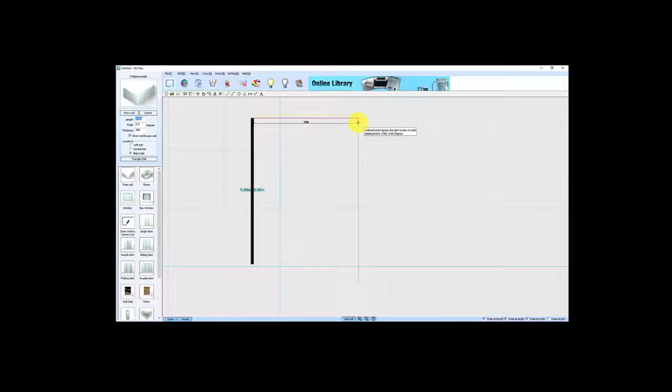So I'll measure out 5,000. Enter. Going to go across 2,500. Enter. Going to go up 600. Enter. Go down 5,000. Enter. Come back down 600. Enter. And then go across 3,000. Enter. Basically just got to create a room.

When you bring the wall back down this way, you see the crosshair will automatically line up with the crosshair on the other side. That allows you to bring the wall to the exact same size. Then I'll bring it across and finish it off, and put my kitchen to the middle.

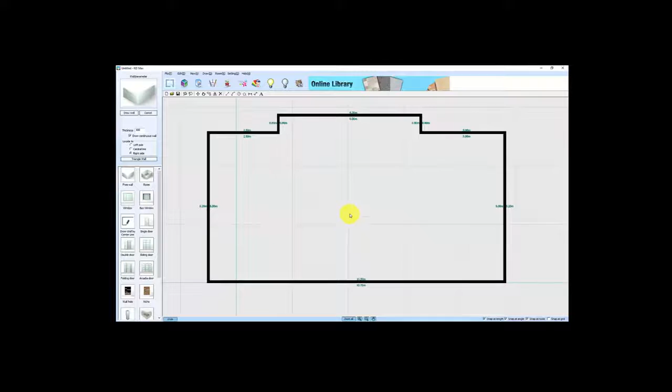From here I'll add in some window openings. I'll go over to my window option, change the size of my window option to 1800, 2 meters for the height, and I want it 200 off the floor. Press OK, click on the wall where I want it to be.

Copy that again and click it on that side as well. Go right click to exit out.

Click on the window if I want to move it and put it in the exact position. You'll see there's a red line and a yellow line with an arrow pointing to the direction, with a measurement. On this one I want the red line to finish at 250. We go OK. On this one here I want the same position, I want the yellow line this time to finish at 250.

And we go OK. From there you can add in other options like adding doorways. So there's a single door. I'll place a single door over here.

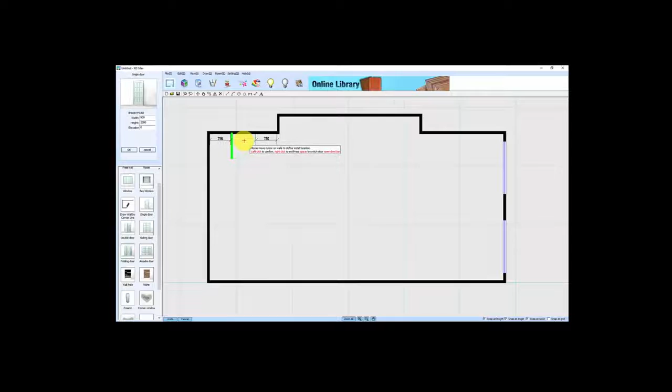Just like that. Now if you want the door to change from one side to the other, you can press your space bar. You can see it's going from left to right, and you can also move it so it goes to an outward opening door. I'm just going to leave it there like that for this one and place it just there.

I'll also place in a sliding door, so we'll go sliding door, and I'm just going to place a sliding door option down to this left hand corner here. Okay, so the main part of my room is finished.

What I'm going to do now is add in a ceiling. So we go up to room, in our menus at the top, we go to auto ceiling, select the middle of the room, and type in the height that I want it to be. And go OK. That puts a red line in the inside measurements of our wall that indicates that we've added a ceiling.

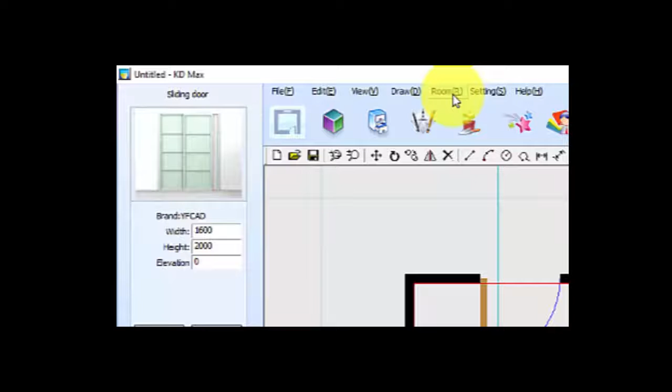What we'll do now is we'll add some lighting at this point. This basically helps you with your rendering process when you go in to do your rendering of the kitchen that you're going to draw.

So what we'll do is we'll add some linear lights. Linear lights is a row of lights. Basically you draw a line from one side of the room to the other, and this option gives you as many lights in that line as you like.

So now I've got as much downlight as I need, I believe, and from there what we'll do is we'll go into our drawing. So we click on our 3D box.

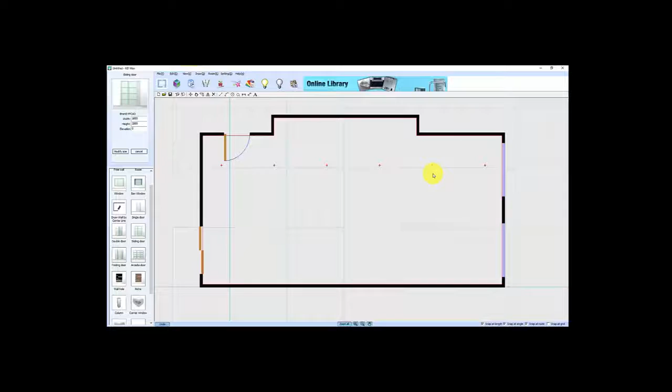We'll go to, comes automatically to this global style setting. Global style settings is where you'll set up your room defaults. Room defaults are basically your door color, your benchtop color, your benchtop thickness, your kicker height, your panel color, basic material colors, and so forth.

I'll just go through the tabs and explain what they do. First one is just a general picture.

Next is setting up your room template - that's setting the color of the walls, door frames, window frames, and the flooring. I'll use this basic one to start off with. Any of those elements can be changed when you're inside your drawing.

Next is selecting a door color. You can select any door color from our range by going into Select. This opens up our menu, inside which are our colors - a selection from Laminex, Polytec, Wilsonart, Formica, the main players in the market at the moment.

I'm going to pick a bright color - China Blue - and we go OK. So now my door color is selected as Laminex China Blue. We go to our next tab, which is where we select our handle.

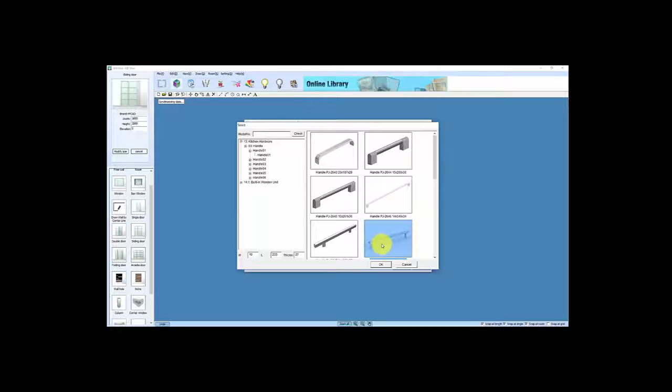Our handles are selected by going into Select. Go find the handle that you want, and pick the handle that you require. As you can see, there's quite an extensive range of handles in the system.

I'll use the one that I want, and I can change the size of the handle to whatever I like as well, so I'll change it to 150. Then we go OK - I just want to match it to that one, and that one, and that one. If you want a vertical handle, you just untick the box here at horizontal.

Okay, go to the next tab. This is where you set the thickness of your bench top as well as the overhangs. I'm going to do a 40mm stone thick top, with a 20mm overhang over the face of my doors, and a 16mm overhang over the ends of my end panels.

We go to our next tab, which gives you the option to set up your kicker heights. Mine is set up at 150mm, 30mm in from the face of my doors, and flush to the ends of my carcasses because I'm going to run my panels to the floor.

We go to the next tab, where you set up the color of the main materials on your job - your worktop colors, end panels, kicker faces, and so forth. I'll go through my worktop ones - I want to change the color, so select material. I want to use Caesarstone Classico, a nice dark color called Jet Black. We go OK, and now I'm going to copy the material to there and to there, and go OK.

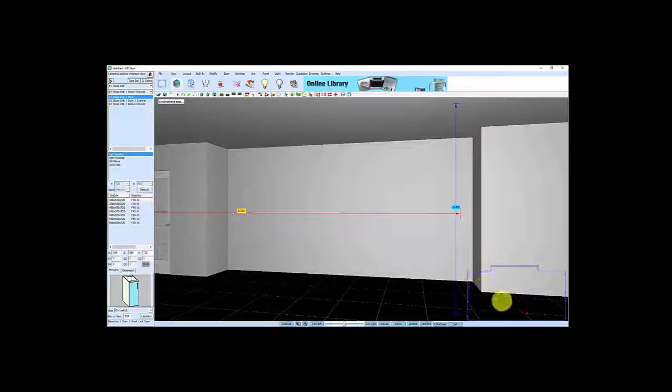You can also navigate in the kitchen area by using this option down in the bottom right hand corner, which as soon as you get into it turns into a camera. That camera will point in any direction you aim it, facing you to where it needs to go. I'm going to point it into that corner, because that's where I'm going to draw my kitchen.

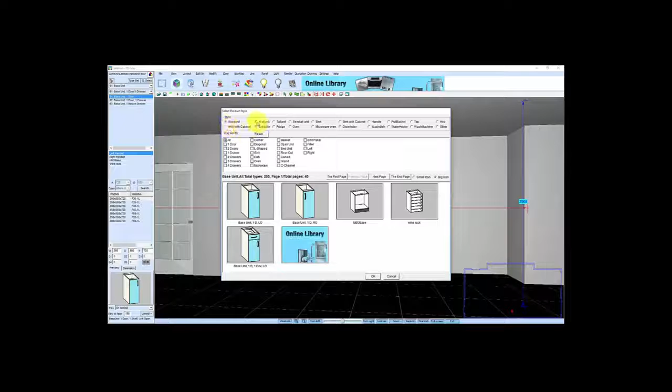Now to draw your kitchen, all your cabinets live in this library on the left hand side. The easiest way to look at that library is to go up to the option called Type Select. You press that and it brings up the Select Product Style box, where all your cabinets live - base units, wall units, tall units, semi-tall units, as well as objects like sinks, handles and taps. So I'm going to start off with the tall unit.

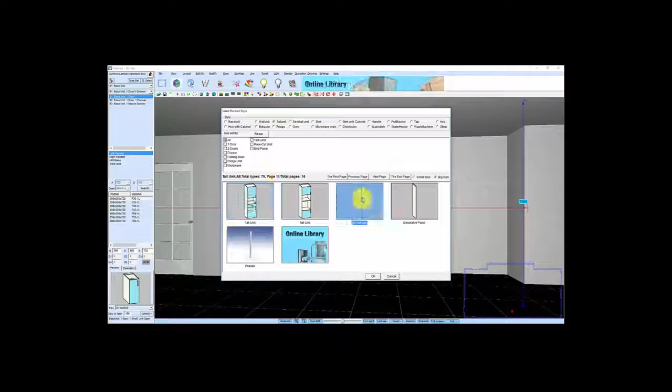In the tall unit I want to start with a filler, so I'll go find my filler, just click through to the next pages till you find your filler. There's my filler panel. I go OK. I want to change my filler from that to 40mm. The depth is 600 and the height is 2250. Okay, automatically sets at 150 off the floor, and we go layout. Place that there, bring it over and place it against that wall and just go no for that option now.

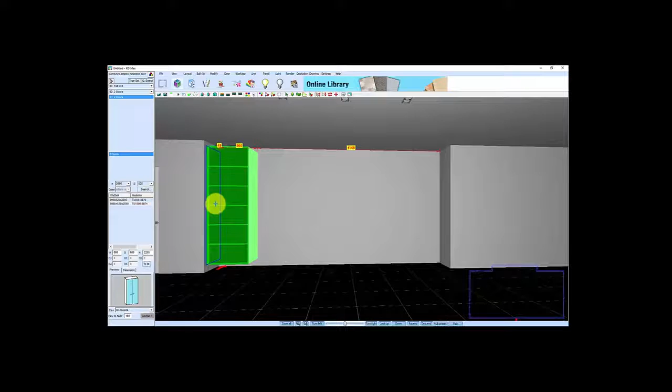Okay, from there what I want to do is then add a pantry, so we go Type Select. We go through to my next page, there's my double door pantry, we go OK. Here what I do is I'll change the size of it to 800, the depth of it to 600 and the height to 2250. Press layout, bring that out onto the drawing, drag it to where it needs to go. When you see there's a blue line touching to the cabinet that you've already put there, it is in position, and you just click on the mouse and that's your next cabinet.

From there you go to your library again and we select a wall oven tower, so I'll select that one, we go OK. From now I just want to change the depth of it, so it's 600, it's 2250 high, and we press layout. Bring the cabinet out onto my drawing and place it to the next one.

Okay, from that section there I want to add an end panel, so we go to end panel, select decorative panel and go OK. Change the width to 16mm, change the depth to 600 and change the height to 2400 because I want this to go to the floor. And we're just going to put that at 0, press layout and place that there.

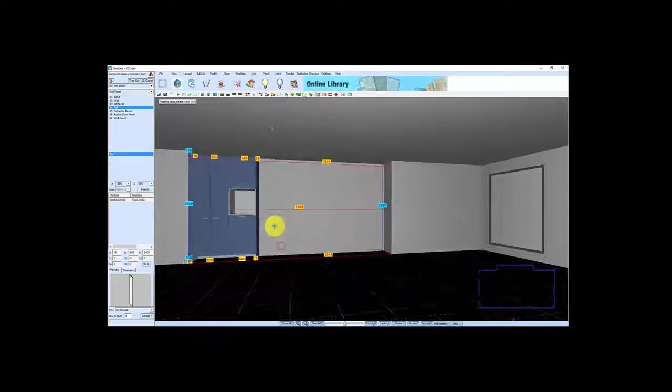Okay, from that side there I want to go to the opposite side now, so I'm going to go up to my wall units. I do want to go to a wall unit double, click OK. The opening size of this is 950, the depth is 350 and the height is 640. It's going to go at an elevation of 1760 off the floor. Be a fridge space, 1760, press layout, bring the cabinet over, butt it to the wall.

What I do then is I'll move that. I want to move it out 250 and I want to move it to the left 40mm. Okay, then we go OK. Whoops, I actually went the wrong way, so we're going to go in 500 this time. That's brought it forward now, so that should be flush to the wall. Gives me a 40mm down the side.

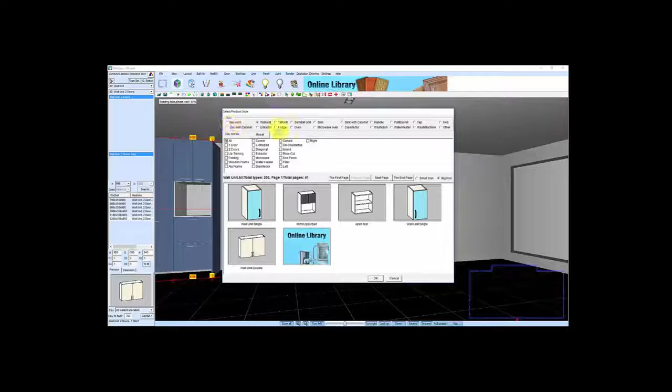What I'll do from there is I'll go Type Select, wall unit, I want an end filler panel, go to filler, go OK, change that to 40, keep it at 350, 640 high, and I want it at 1760 off the floor. Press layout, drag it there and butt it in and just go no. So there's my filler for there.

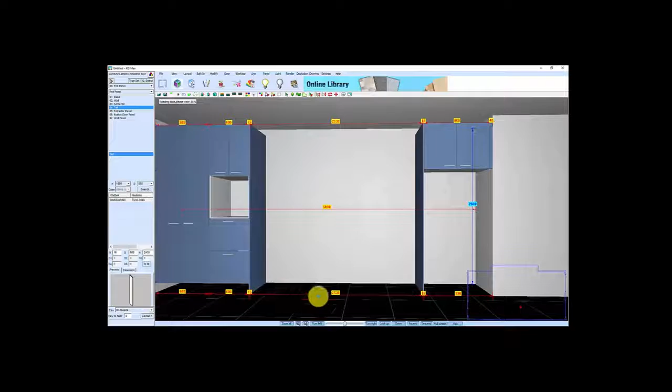So on that side there, what I want to do now is put another end panel and run it to the floor. So we go to tall units, end panel, decorative panel, we go OK. Change the width to 16, change the depth to 600, change the height to 2400, and we just want to go on the floor at 0. Okay, layout, and place that there. So that's flush to there. Then that gives me an opening. So now I've got a 2538 opening in between those two panels.

So in between there, I'm going to put some base cabinets. So we go to type select, go to base unit, go to 3 drawers. Okay, so I'm just going to use this 3 drawer option. So it's a 180 fixed top drawer. Size is 846. Depth is 580. Height is 720. Press layout.

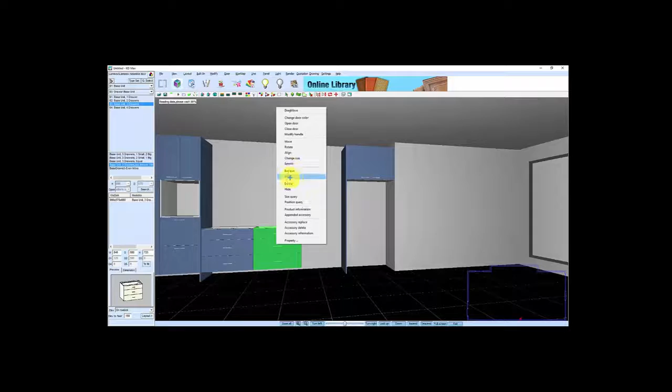Place it there. Then I'm going to copy that cabinet. So right click, copy, and place that there. Then I'm going to copy that cabinet. So right click, copy, and place that there. So 3 cabinets, all the same size.

Okay, so now above those cabinets I'm going to place some overhead cupboards. So we're going to go to wall unit, going to go to the next page. I'm going to use an aluminium frame glass doors. So we select that, we go OK. The width of these are 800, the depth is 350, the height is 840. Elevation is 1560 off the floor. Press layout, bring my first cabinet up, place it to there.

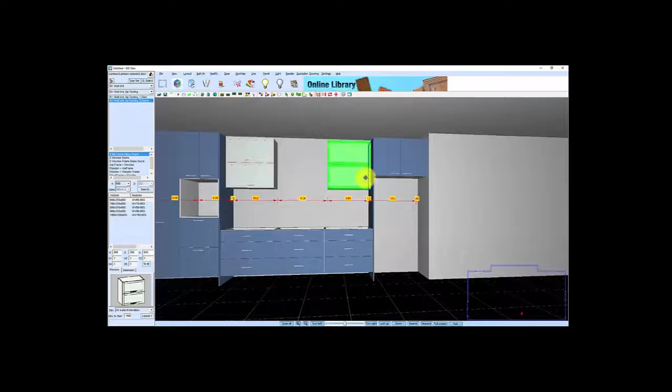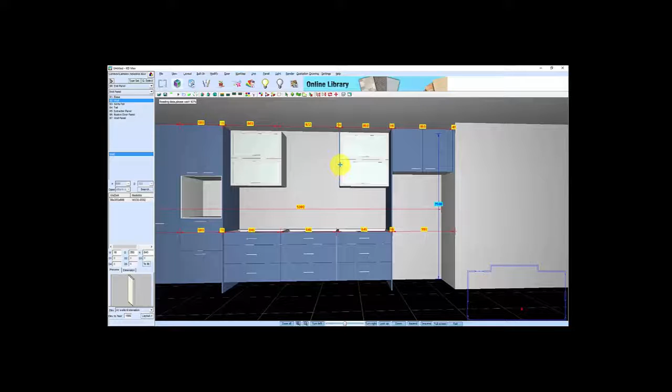Okay, then I'm just going to copy that cabinet, go copy, and place that there. So from there, what I'm going to do is put an end panel on each of those cabinets. So we go to overhead end panels, select decorative panel, and go OK. The width is 16, the depth is 350, 840 high is the height of the panel. 1560 off the floor, put that one there. So then I'm just going to copy that, go copy, and place that on the end there. So now those 2 panels are matching.

Alright, so we've got 906 left in the middle. So in the middle of that, what I'm going to do is put a canopy. So we're going to go type select, going to go extractor, going to go find my canopy that I like. So select through the first few pages, you'll come into where the canopies are, and we'll use this one. Go OK, go layout, place that straight there.

Okay, so then from there what I'm going to do is I'm going to put a bulkhead across the top of all those cabinets. So I'm going to go up to line, going to create ceiling filler, going to select units to create ceiling filler. So I select the first one, I hold the shift button down, select the next one, select the next one, select the panel, select that cabinet, select that end panel, select that filler, select that one, and that one.

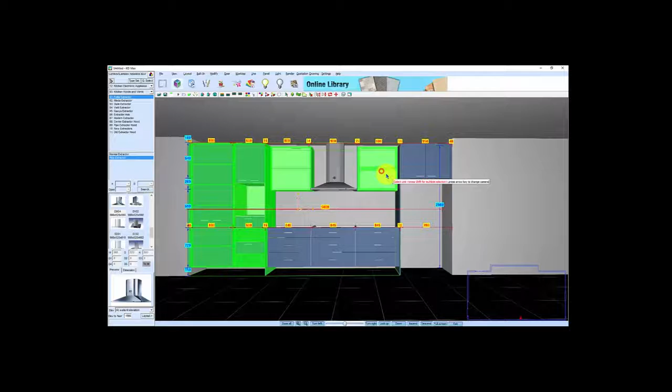Go right click. This is going to go to the ceiling, so that automatically matches to the ceiling height that we set up. I'm going to change this so it comes in 30 millimeters from the front and 16 mil in from the sides. Okay, and then we just go OK. Now you can see across the top there, it's all set up as a bulkhead. So those bulkheads are all sitting in from the face of the doors and in from my end panels.

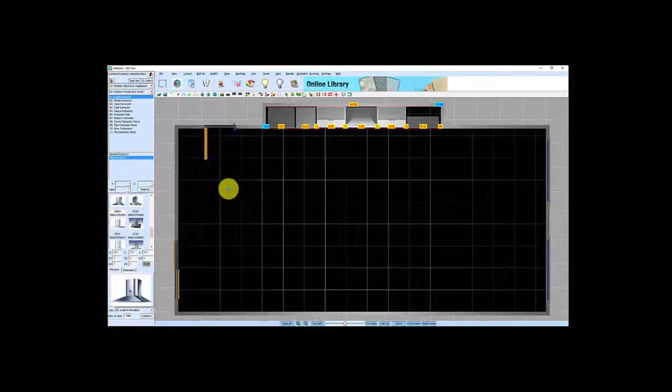Okay, so from that option there, what I'm going to do now is create the island section of my kitchen. So I'm going to change my view on that, so I'll just move it out a bit. I go up to view, I go to top view. This will change where it looks, so now you can see I'm looking down on the top section of my cupboards. So I want to find my first cabinet, so I can go to my library, go to base units. I want to use a three drawer box again, just an equal drawer in this one, and we go OK.

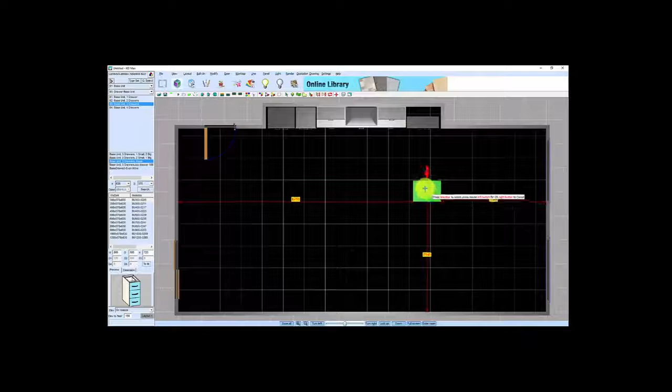Now the width of my cabinet on this one is 800, the depth on this one is 580, and the height is 720. Press layout, we bring it out onto my drawing. What you can see now is that it actually brings a measurement with you, and it's also facing the cabinet the opposite way. So to make the cabinet face the way that I want it to go, I want to press my spacebar. Okay, so now I move my cabinet to where I want it to be as close as possible, and I'll leave it into position.

Now what I can do is I can actually check the position of where that cabinet sits. So I go right click, go position query, and I can say distance to wall, select my wall, and it tells me that I am 1324 between wall and face of those doors. So by the time the bench goes on, I will be 1300. So I might want to move that in, say 200.

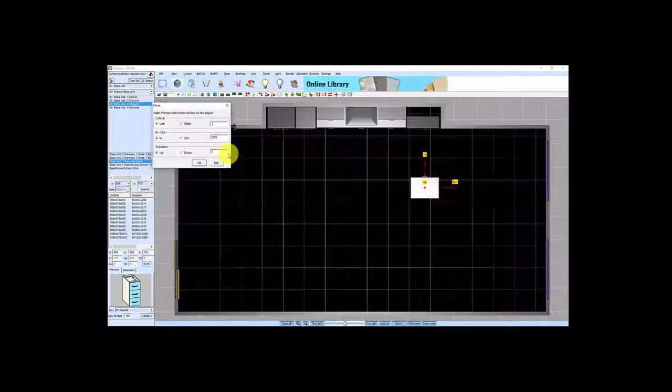Okay, so to do that, I can just click on it, go move, and I want to go on the in direction, and I want to go 200 mil. Alright, so that's going to go okay. So now I should have a clear measurement of 1120 in between. So I can check that again by going position query, distance to wall, 1124. So by the time the bench gets on there, it'll be 1100 gap between cupboards. Okay.

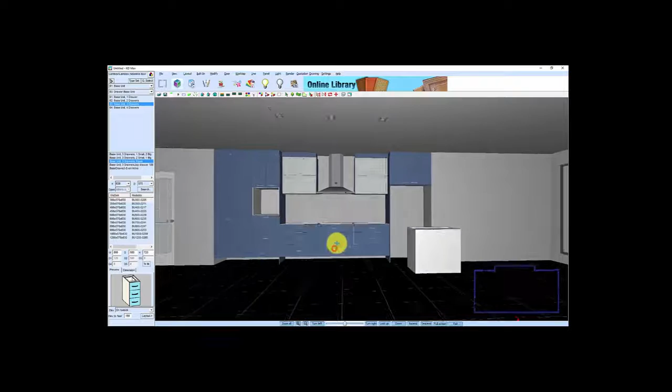What we'll do then is I will then go exit. From there we can now start placing our other cabinets. So what we do is we'll go back to our original view, which is our 3D view. So you press the world over the top there, and what that does, it takes you back to this view here. So from here what I'm going to do is press type select, and I'm going to create a dishwasher space. Decorative panel, go OK, press 16 mil, 580 deep, 720 high. We'll press layout, bring that over and place that onto the cupboard there.

My next one I'm going to do is I'm just going to put a filler above my dishwasher. This helps me with my bench top when I go to fill it later. 20 mil, and it's 850 off the floor. Okay.

Whoops. Press escape. Width is 610. Press layout and go there. So from there I'm going to copy that panel and place it on the end of here. Now you can see I've created a dishwasher space. From there I press type select.

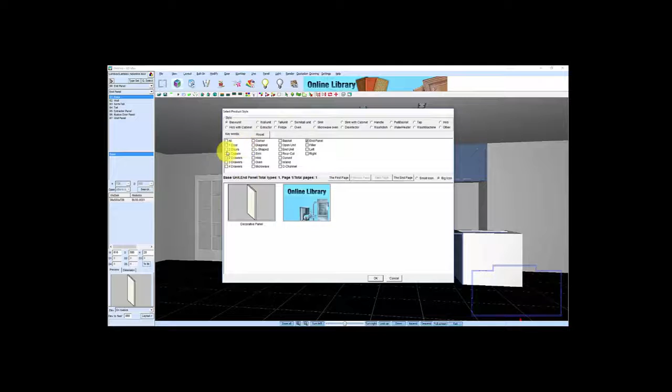What I'm going to do now is put in a sink cupboard, so I just want a 2-door sink cupboard. Press the end panel, press that, go OK. So the width of my cabinet is 800, the depth is 580, the height is 720. We press layout and place that there.

Alright, so from there what I want to do is I just want to copy that cupboard. So we go copy and place it on the end. Oops. We go copy, place that there. Then I just want to copy that one there again, copy and place that there. So there's the basis of our cupboards.

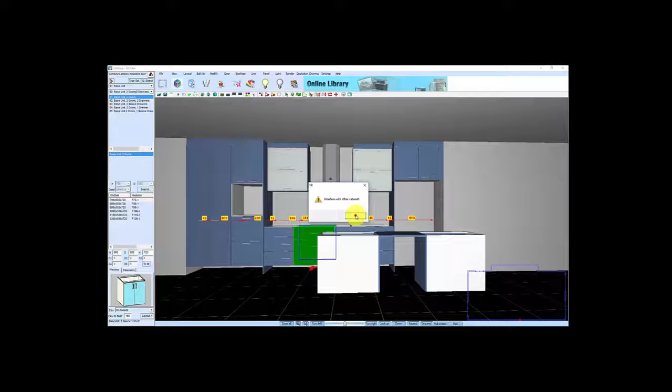So what I want to do now is place a bar back on that cabinet. So we go to base units, end panel, decorative panel, go OK. The width is 1600, is 1921. The depth is 16 and the height is 870. I want to put that on the floor. Let me just press layout.

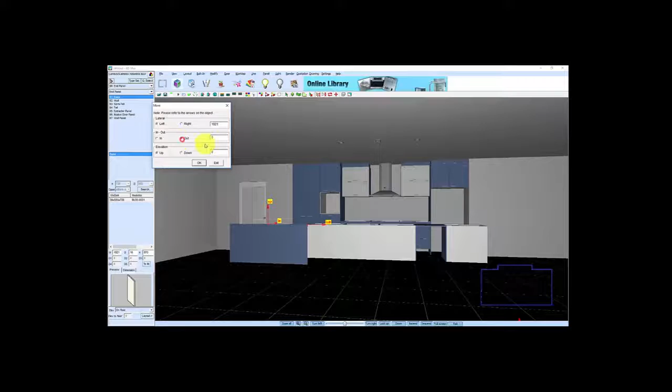Place that there. Get yourself into a position, right click onto that, and we just want to move it into the first position. So I want to go to the left, 1921, and I want to come out 16 mil. And we go OK. So that places the first one into position, and now I'm just going to copy that and place it on the end. I've built it into two because it's such a large bar back, so it needs to be two panels.

Okay, from there what we can do now is we have an added feature which is called automatically install bench tops. This is where the settings that we set up at the start come in handy. Up the top corner here you'll see that's an auto install worktop button. We press that. Once we press that, the bench tops will then go on top of your kitchen, the thickness we set up, the color we set up, with also the overhangs that we set up.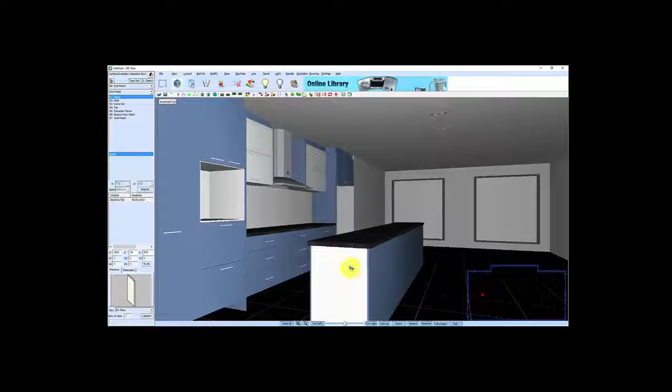From there I want to continue editing the bench top to create a breakfast bar on the right hand side. So I'll go up to worktop, I go edit worktop, I'll select the edge that I want to edit. So it comes up with this. You'll see there's a blueprint of the kitchen underneath. I want to look at that sign there. So that is edge 0 to 3. So we click on that edge, go right click, go side move out.

I want to go 2, 6, and then we go OK. Once you've done that, you go OK. It takes you through to a section where it tells you that's the size of the bench. Then we go OK, and then you can see now, get yourself into a good view of it, we've created an overhang there.

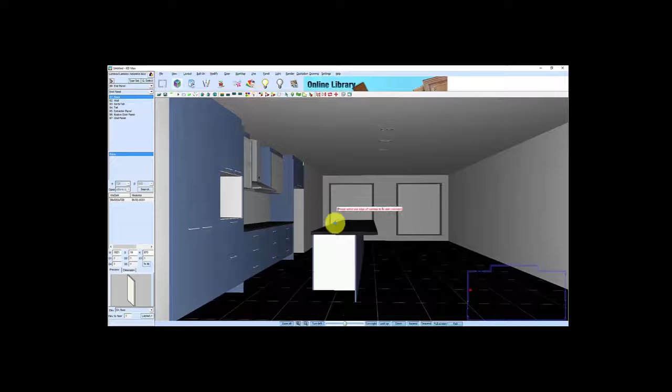From there, what I want to do now is create a waterfall end on both ends of that cupboard. So we're going to go worktop again, create side worktop, select the edge. The width is there, so the width I want to put at 40. Sorry, 24. The thickness is 40, the real thickness is 40, and it's going to go to the floor.

But as you can see, there's our waterfall end. Okay, you can sort of see that looks a bit blotchy. The easiest way to fix that is just go to render, go to fit map, select the edge, go right click, and go OK. So now it's all in one.

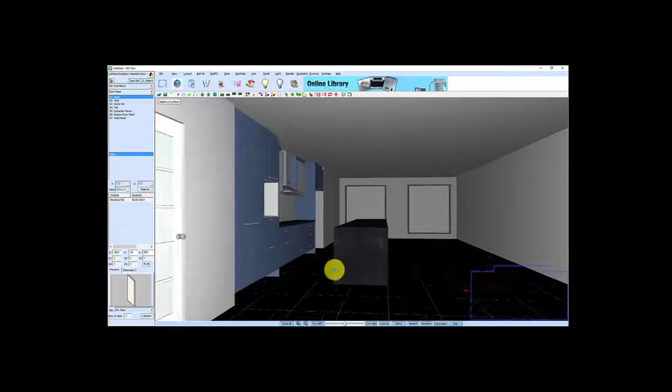What I want to do now is go to the opposite end, and I want to do the same on that section there. So we go to worktop, create side worktop, select my edge, go OK. Okay, then I want to do the same with that. I want to go to render, just go to fit map, select that, go right click. We go OK.

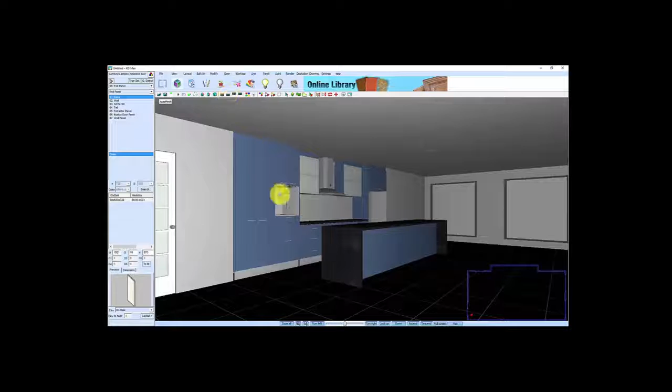Right. So now we are starting to get the basis of a kitchen. You can see from there we've got our island bench. What I'm going to do now is I'm going to put in the kickers. So that is an option with the kickers, the same as what we have with the benches. There's an automatically install next door to it, so we go auto install plinth. Select that, and that'll automatically install the kickers at the color and the dimensions we set up.

If it doesn't do all of it, you just go to line, create plinth, select units, select that one, and go right click, and there it goes, it fills it up. You can see all the way down, point into there. I'll put kickers all the way through there, and you can point through there. I'll put kicker faces all through there.

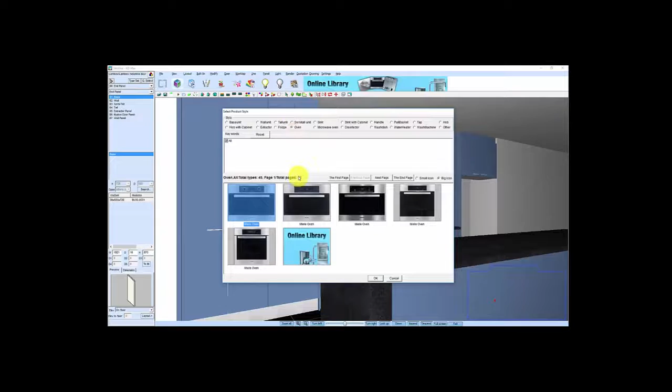Alright, so from that point, what we do now is we'll add some appliances. So I want to add an oven in there first, so we're going to go up to type select, going to go to oven. I'm just going to select an oven, so just this Miele one will be fine. We go OK, and basically I know that opening is already 600, so I'm just going to go auto fit to size. So we go layout, select the bottom of that, and then select that, and that automatically puts the oven in where it needs to be.

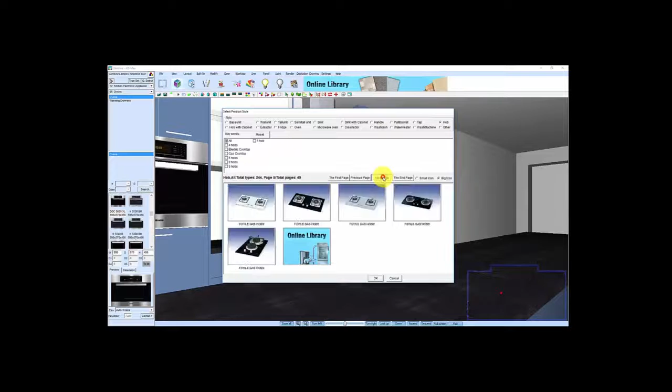From there, what I'm going to do is place in a hot plate. So we go type select, go to hob, just go to all of them. You can see there's quite a few different ones in the system. Quite an extensive range. Something that you want, we can just go to 5 hobs. Gives you large options. We'll just use this Miele one here. We go OK. Size is correct.

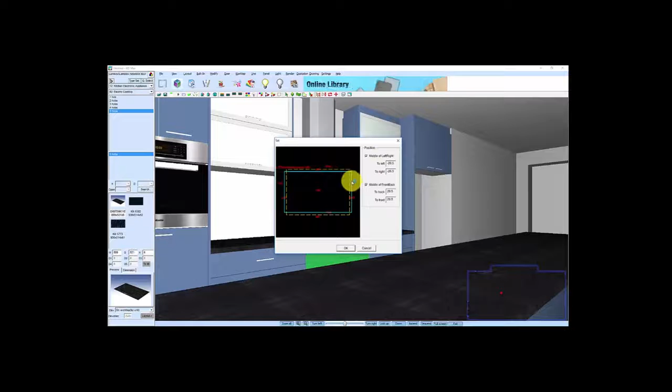I want to basically place it in the bench top by the unit, so by that cabinet there, and we press layout. Okay, press that. That puts it, there it is. The blue line is the hot plate, the yellow line is the cupboard underneath, and then we just go OK. There is our hot plate.

Okay, now you can double check that that's directly in the center of that one by clicking on the hot plate and go align to that. Just go left-right middle, front-back middle, and we just go OK. So now that hot plate is directly above that.

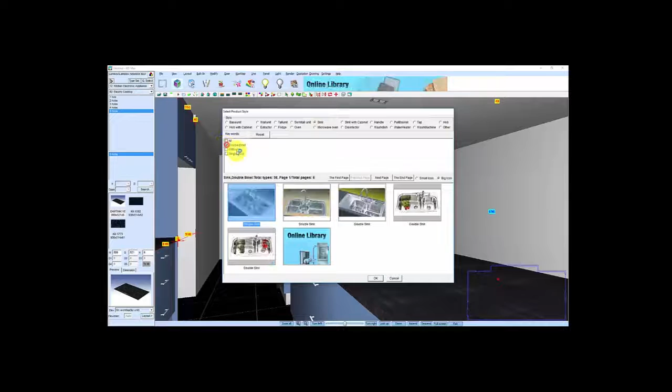Okay, so from there what I'm going to do now is add a sink. So I want to get a good sort of view of my sink cabinet, which is just there. I'm going to go up to type select, going to go to sink. What I'm going to do here is just go double bowl. I'm going to place an undermount sink. I'm going to use this one here. We go OK. The width of my sink, I'm just going to change that to 800.

Press layout, press the cupboard that I want it to go onto. The sink is larger than the unit, the worktop may not be created correctly. Just go yes, because I know it will. And basically again, you see the blue line is the sink and the yellow line is the cabinet. Okay, and we just go okay. Sink over the worktop? I know I don't. I want to go under, so I want to go under worktop. So we go okay. We go okay.

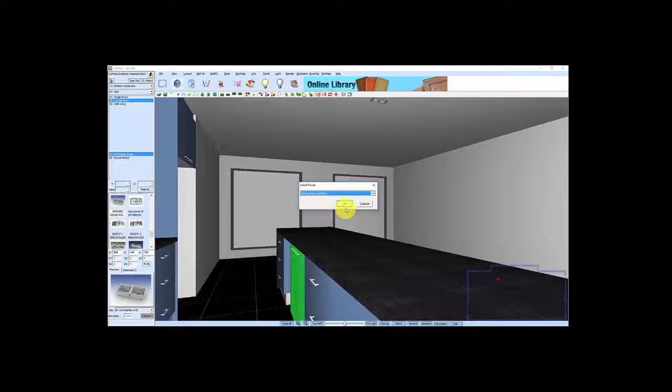So there you see, that puts the sink there. All I want to do now is just move that up. I just want to go up 20 mil, because I want it just to sit down from the top of the stone 20 mil. And we go okay. So there's our first sink. We go exit.

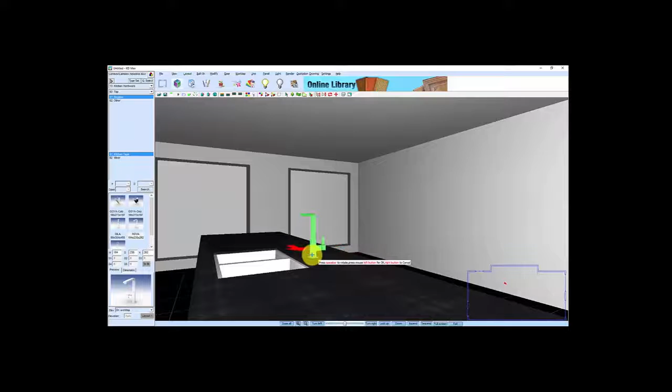Okay, so from that point there, what we're going to do is add our tap. So we go type select, we go to tap, just go through, we'll pick a tap, so we'll just use this one, and we go okay. Alright, the height of the tap, we're going to go on worktop, and we just press layout. What we do then is we just press the space bar, so the tap is turning around, and I'll get that to the middle by placing. Okay, so there's our tap in the stone.

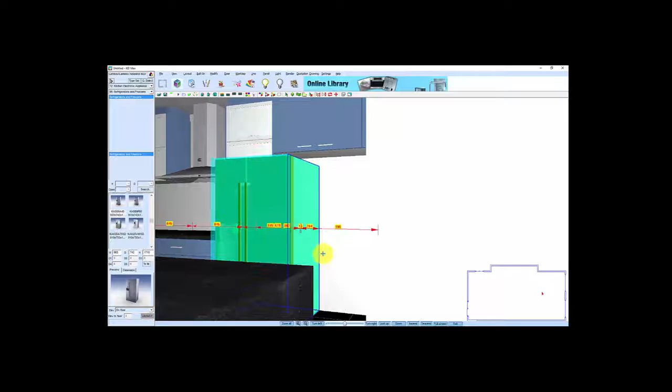Right, so my next appliance is I'm going to add a fridge. So we go over to our fridge cavity. I go up to type select, go over to fridge unit, select the fridge that I want. I want to put in a double door fridge unit, so we select that one there and we go okay. Keep the width at 900. And press layout. Okay, that's going to place that straight there.

As you can see, that's in the middle of that cavity now. Okay. So from there, what I want to do is go back to point this direction here, and I'm going to place in a dishwasher just there. So we go to type select, we'll go to dishwasher, they call it. We'll grab a brushed aluminium one, we go okay, press layout.

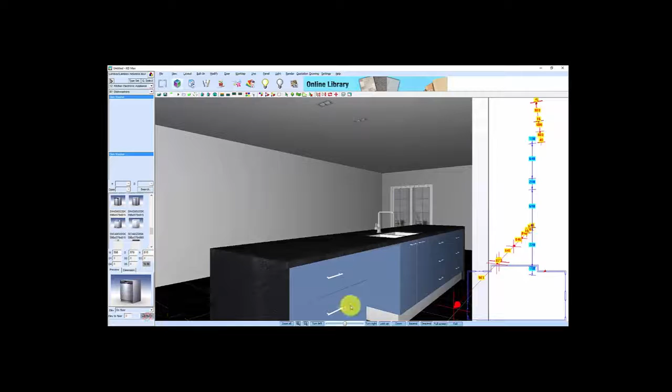Okay, so now this is where I'm going to use my filler, so I'm going to click on that, go align to my filler. So I want the front and front to meet, and I want the left to meet the middle and middle. There we go, okay. So now that places that in there. Now you can also change the size just to make it look a bit better. So I'm just going to go 850. Okay. So there's our dishwasher placed in.

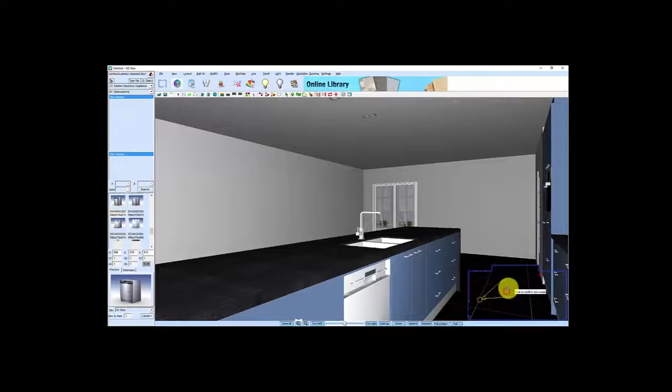From there, what we'll do is we will start adding smaller accessories. So go in and change the floor. So I can click on the floor. I'm going to change the floor to a timber material. So go from carpet to solid timber. I'm going to use Tasmanian oak. We go OK. Alright, I just need to render that.

So we go to render, fix map, select, go right click. I want to change it so the direction of the grain is running along the wall, and just got to change the different laminations. So that's 3, we'll just go 1.5. So now that looks like real timber.

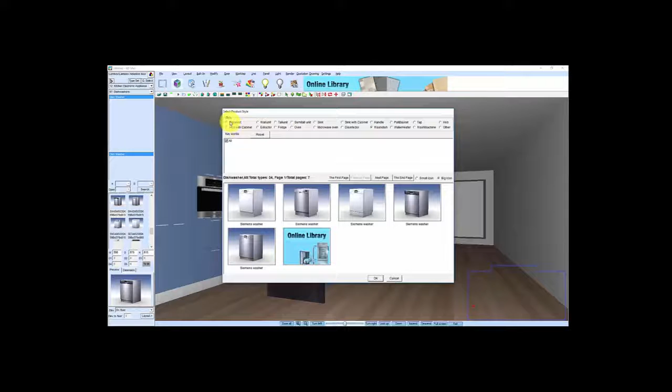From there, what I'll do is I will start adding some other options, like some chairs. So we're going to go to other. In other, we go to dining products, go to the next page, next page, next page. You can see there's quite an extensive range of dining products. Go through until your chairs come through. In there you'll start seeing some high stools.

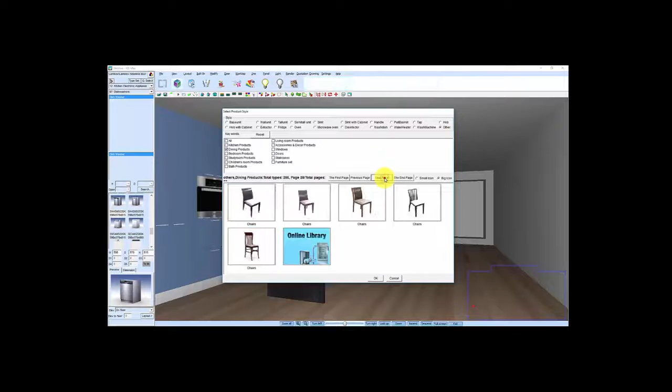Once you get to the area, we'll start putting them in. So I'll use these white ones. We go OK. When that comes up, you also should say yes. So from there I just want to press layout, bring the stool out, place it at the back, turn it around using my spacebar, sort of placing it so it looks like it's been lived in.

Okay, then we're going to go layout again. We're going to place 3 or 4 across the back here. Place that one there. Okay, then from there I'm going to place another one as well. And there. Okay. We could also add other objects to the benches, so I'm going to go through and show you where there's some more objects in the system.

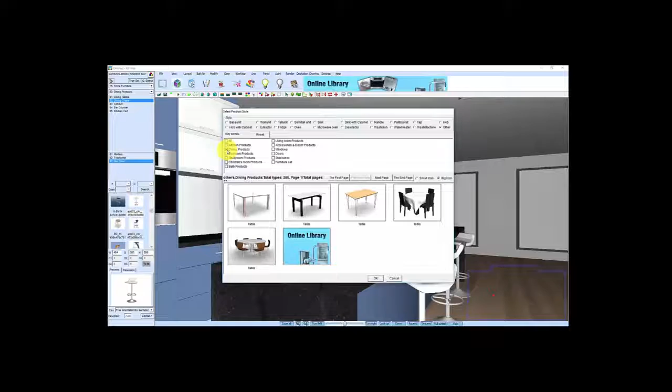Kitchen products. You can put pots and pans on the stoves. You can put objects on the benches. Knife block, so I can put a knife block over on the surface just next to there. So just place that there. As well as that, while I'm there, I'm going to add a splashback.

So we go type select. I'm basically going to use a wall unit overhead panel. We're going to turn a panel into a splashback. So we go to end panel, go to decorative panel, we go OK.

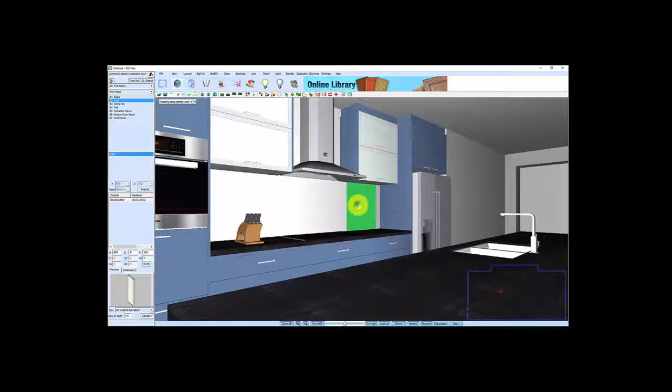I just want to change the width to 600 at the moment. The depth, we're just going to put it at 6 mil. The height, I want to put it at 650, and I want to come off the floor 910. Press layout, bring it up, place it there. Okay, so then I'm going to go right click and I'm going to extend it to there.

Then I'm going to go get a better angle. I'm just going to go right click there, and I'm going to extend that to there. So there's my splashback. So what I'm going to do now is change the color of the splashback so it's something nice and bright so you can see it.

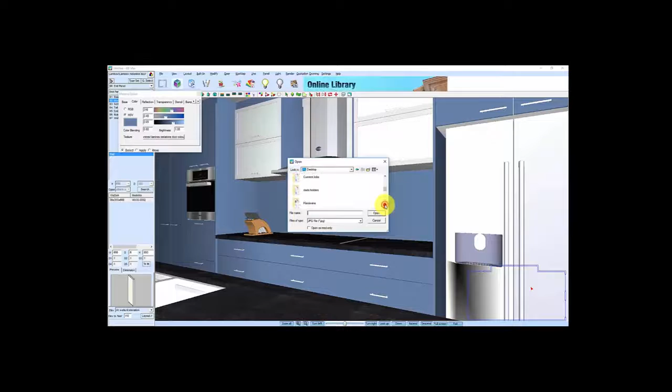So I'll click on this button up here, which is Material Editor. Go to color, select melamine, go browse, basically go to where I've saved some JPEGs on my system, to the desktop. Click in there. I want a nice bright yellow color, and we go open. We go OK. Once I've done that, then we go OK. So I've got a nice bright yellow splashback.

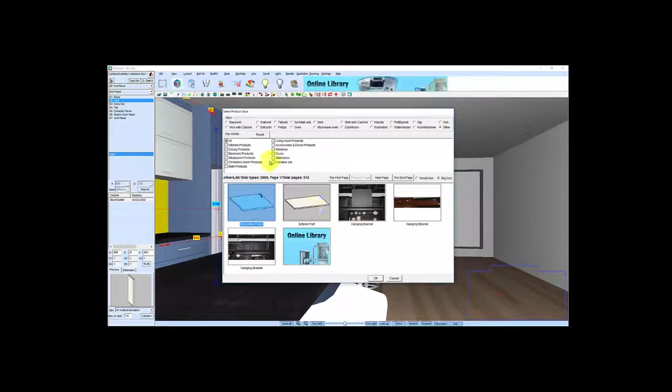So from there, what I can do now is just add some more objects to the benches. So we select over here. I can put in some pictures on the walls over here. So go type select, go to other. I want to go to accessories and decor products. Go to next page, next page, next page. So on there. I might go back to that one and add that onto the bench. Just place that there.

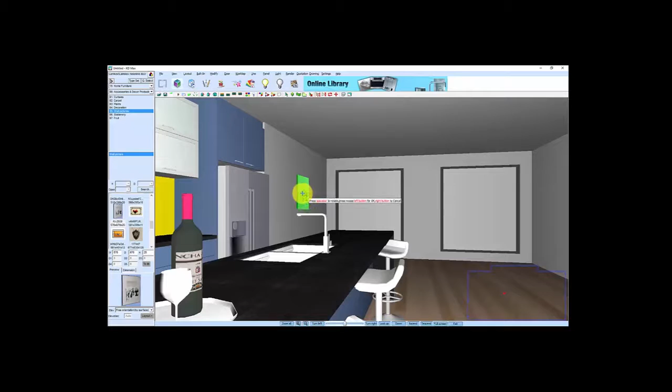Okay, then I'm going to go back into there, wall pictures, and I'm going to add a picture. Okay, so I just want to use that one. Press layout, basically place that up on the wall. Okay, you can point it in that direction.

I can also change the size of that if I wanted to. So I can make that say 700 and go. Okay, so it makes it a bit higher.

I'll just add some more products using our menu. I'm just going to click through my menu bars, might just add some pots and pans and some dishes. So just grab this dish rack, go OK, press layout, drag it, put it up where I would like to place it, just near the sink area, just there.

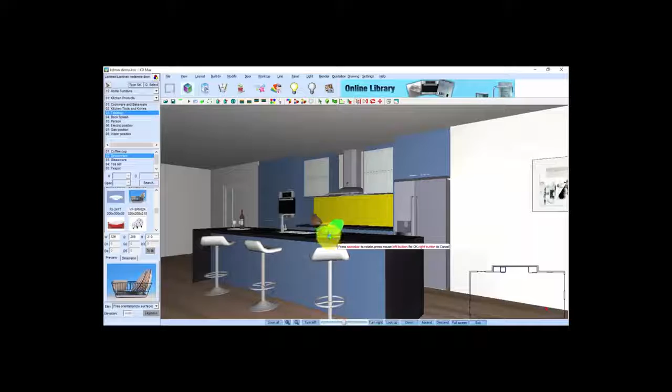You can also add other objects. I'm going to add another object to the back section of the wall, so just go through my pages. As you can see, there's quite an extensive range. Click through.

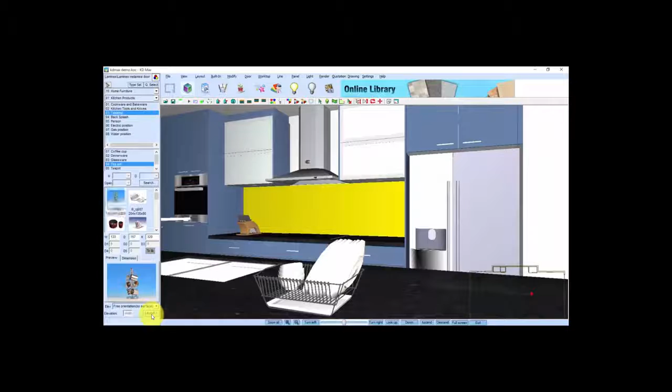Just going to add a bit of a decorative thing to the right hand side of the hot plate. I'll just add the tea set. We go OK, press layout, grab it and place it and put it on the bench.

What I'm going to do there is go down to my navigation bar down the bottom, point into that direction, and in that section I'm going to add a table and chairs. So we go to type select, go to dining products, select tables, so go to my end page. As you can see, there's quite an extensive range.

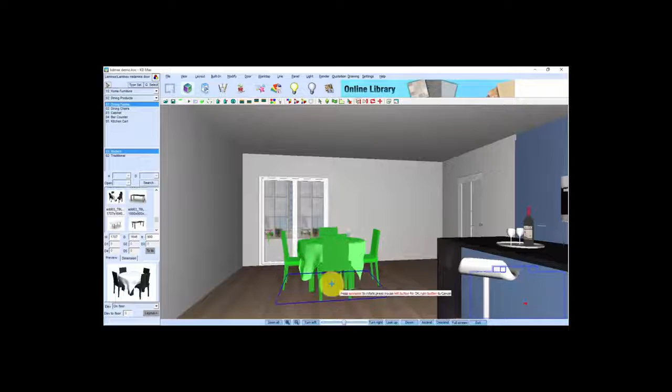I'm going to go back to my first page and just use this table and chairs. We go OK. From there, what I'm just going to do is press layout and place that on the floor in front of that sliding door. And you can continue adding more objects to make it more customized to suit the customer.

Once you've added all your objects, what we do then is we start the next process of rendering the product. From there, we turn on the lights by pressing this button here. This starts the ray tracing. Ray tracing basically goes over the drawing quite a number of times and enhances the product, so you'll start seeing all the lights turn on, all the gloss levels of the room will change, the flooring will change, you'll see chrome levels in the legs on the chairs. Basically everything's just going to pop out of the page.

I'll let that trace. That usually ray traces for about 200 times, and the process usually takes about 2 to 3 minutes. Continue on.

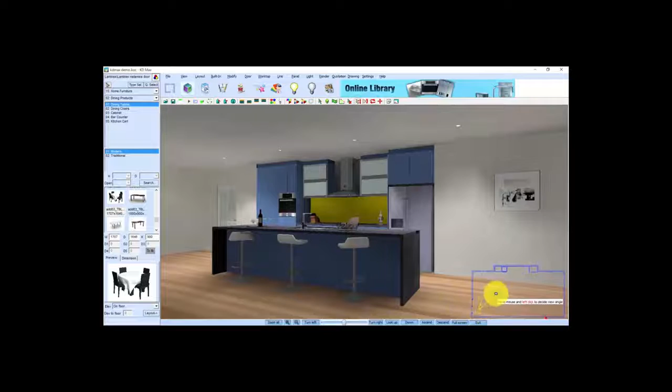Getting up to ray tracing of 200 now. Once it gets to the 200 mark, it will automatically stop. And what you do from there is just like taking a shot with your standard camera or your mobile phone. You can navigate around the room, point yourself to any direction you require.

So maybe I want a shot from there, so get a bit of the table into it. And what we do is press this button here, which is the camera, called Save Image. Press that, go High Quality Effect, and that'll take a snapshot. Come down the bottom here, press Save the Image, and that'll save it to the folder that you've created to save your job into. We go Save. Picture is saved.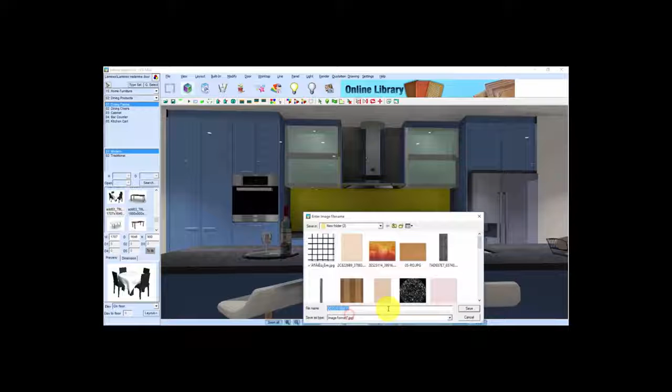Then you go again to anywhere on the drawing down the bottom here. I might want to take a nice little picture of that. Take snapshot, go High Quality Effect, and press Save. And again, continue to make some more snapshots. I'll do it on that side there, and save. And I'll take one more facing this way, just so you can see sort of down in the gully of the kitchen.

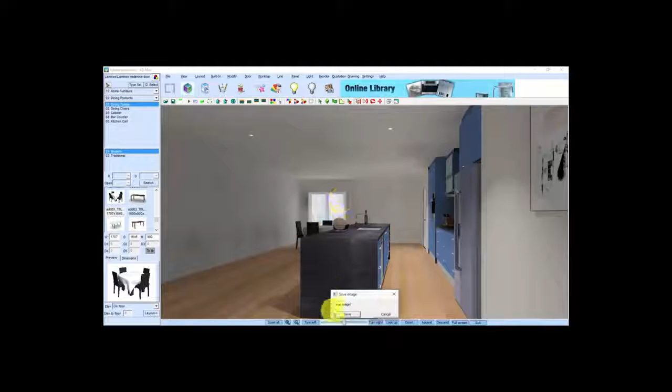Once you've taken all your snapshots, what we do then is turn the lights back off again, go yes, and we continue on with the next process. The next process is now to produce a quote.

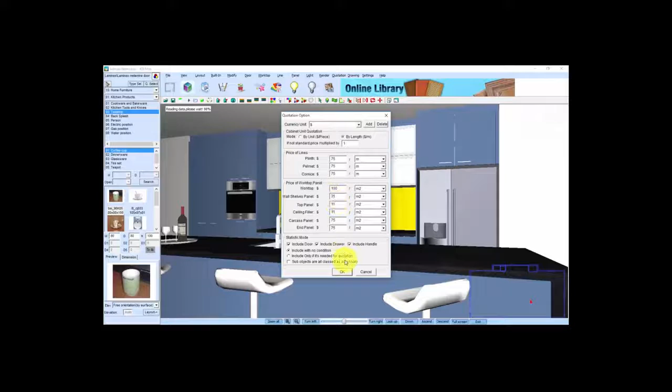The quote will basically quote everything that is on this page. To create a quote, you press this button here, which is auto quotation. What the auto quotation will do is quote everything that's on the page. So we go OK for the first one, go OK for the second one. It comes up to this one. This is going to do it in the currency of Australian dollars. We've got some prices added into there just as samples. It's going to include all the hardware, and then we go OK.

From there, what we do is we export it to an Excel spreadsheet. So we go Export. We go No, because I want to have more than the total price. As you can see, it'll automatically open up Excel and it will produce a quote with all the information from the previous drawing added into here.

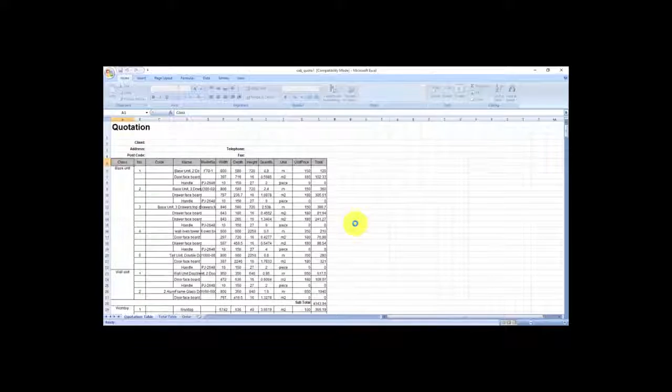Okay, now you can save that to your job. I'm just going to cancel.

Basically, the first section up the top is where all your cabinets are, so it's all your base units, wall units, all the cabinets in the job. There's the aluminium door frames, there's all your handles. Basically everything's been priced, there's your subtotals, there's your worktop priced up as well, and then there's all your accessories. You basically in here will be anything, so as you can see, it's pricing all the items on there, like chairs, bottles, everything. You can remove those, but add your hardware, like all your drawer runners and hinges and things. Down the bottom it gives you total price.

Okay, from there we then exit out of that. I'm just not going to save it. Go back to the drawing.

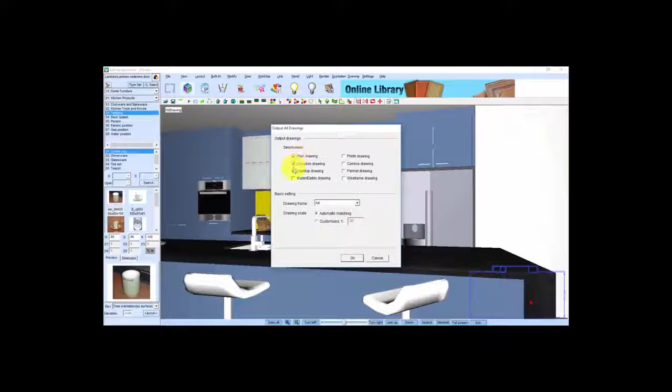From there, what we do in our drawing is we want to produce some 2D images. The 2D images, we create them by pressing this button here. I'm going to produce a plan drawing, an elevation drawing, a worktop drawing, and also a wireframe drawing. We go OK.

This will open up BricsCAD. BricsCAD comes with the program, and it'll open up and start a couple of times because it's got a couple of objects to produce. We go OK.

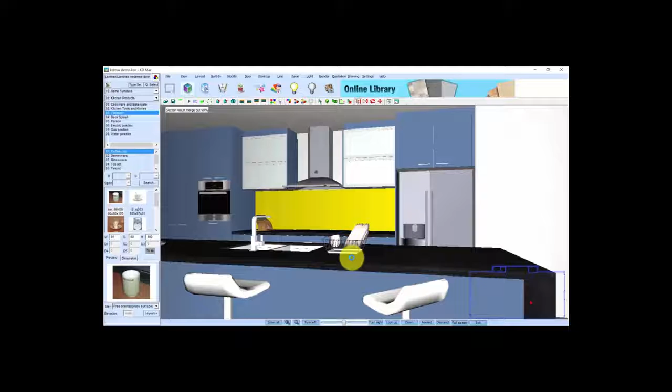There we go. As you can see, it's generated all the images, including a perspective of where the cabinet kitchen was sitting in your last aspect view.

What I want to do is delete that title block that comes with it. We delete that, go delete. We can move these objects around. Click on your move, drag them so that they're nice and neat. Want to zoom in on that one.

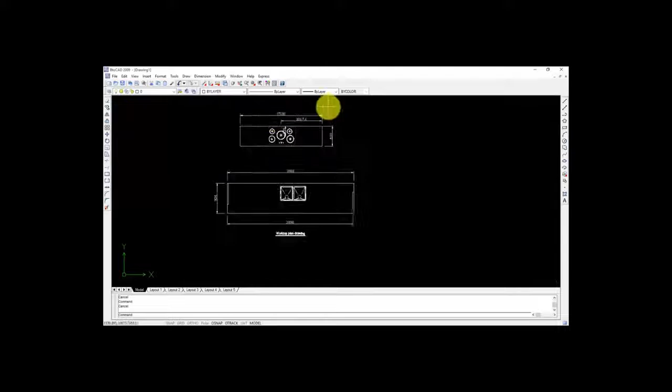Basically with this you can add writing on it so that you can tell where the edges are seamed. So we use our name section down the bottom here, draw a little box, comes up with this, change that to 85 so it's nice, and then bring this up, so I want to put seam. Then go OK. Drag that to the middle.

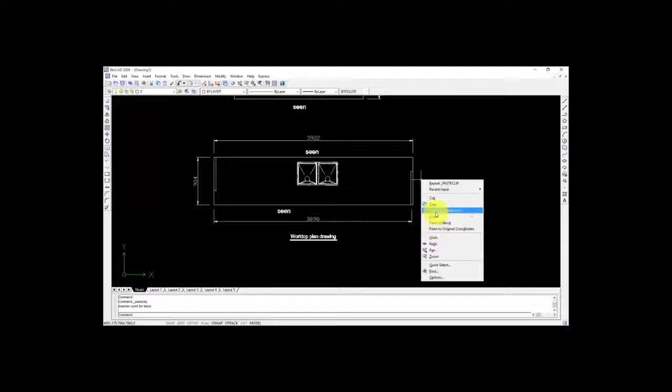Then we're going to right click, copy, and paste it there, and paste it there, and paste it there, and paste it there. Okay, so basically that's the benchtop giving you where the cutouts are for your hot plates.

You can also add measurements on there. You can add extra text if you like. Drag that to the middle,

put it there. So what you can see now are your different views. So each view has all the information required, so there's all your sizes, all your cabinet numbers, everything that you need to manufacture your drawings.

There's your front elevation for your island bench, and your front elevation for your A view, which A view basically you'll see here, that's your A view, and there's your B view, there's your floor plan.

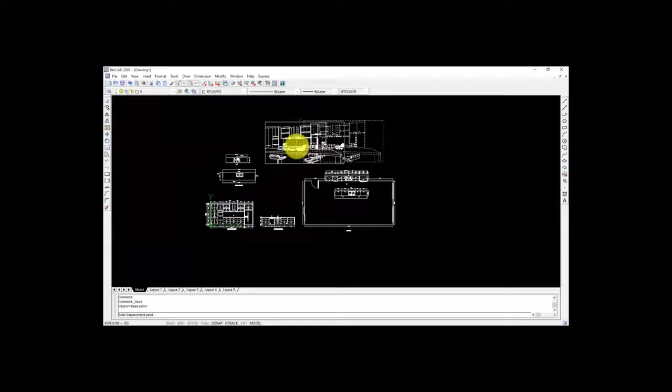Okay, from there just move that back a little bit so it's in the center. What I'm going to do then is use our templates, which we use here in our tab layouts. Double click into the center of that, activate it, bring all your drawings in, drag it to the center, zoom it out so it's in the middle, double click, and there's your drawing.

Down the side here we have options to fit all your job's information, so you can put in your handle types, anything you want, the color of everything, all the job information, and so forth.

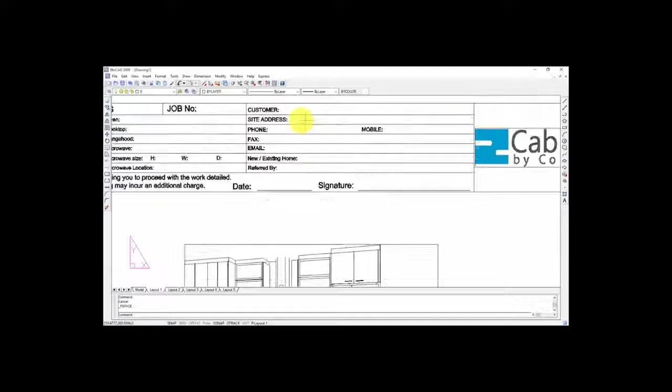Right, double click on there, brings it back to the center, and then we just print it out. So we go plot, find your printer. I'm just going to do it as a PDF, change the size. I want to put it as an A3 page so it's nice and large. Press extents, preview, fit to paper, and that's what it's going to print.

From there we can go to our next tabs, and in this tab we want to put individual drawings, so the drawings are nice and large for you guys on the floor to read. So we just grab that one there, put that into the middle. That one there will be printed out on that page.

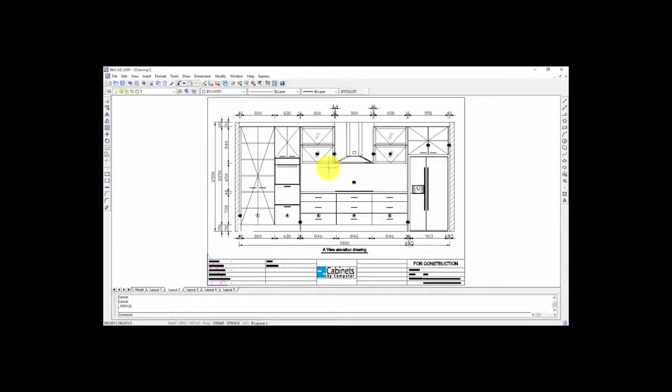Then we go to this one, zoom it into your next one, drag it into the middle. That'll be printed on that page. Do a plan view by itself so that you can see it, just like that, and it could be printed on that page. Basically just like that.

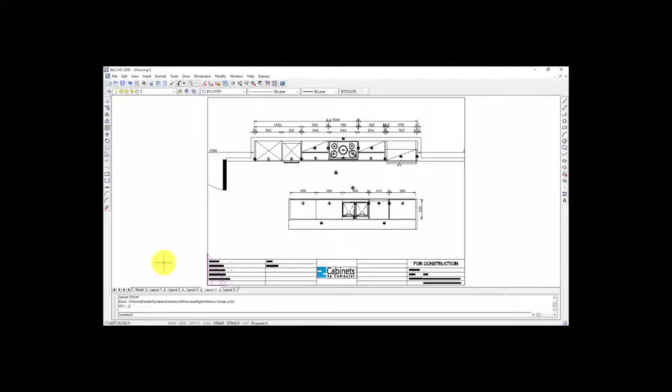What we do then is that the KD Max part is finished. From here onwards we want to import these pictures and drawings into our WoodCAM program to generate our cutting lists and CNC information.